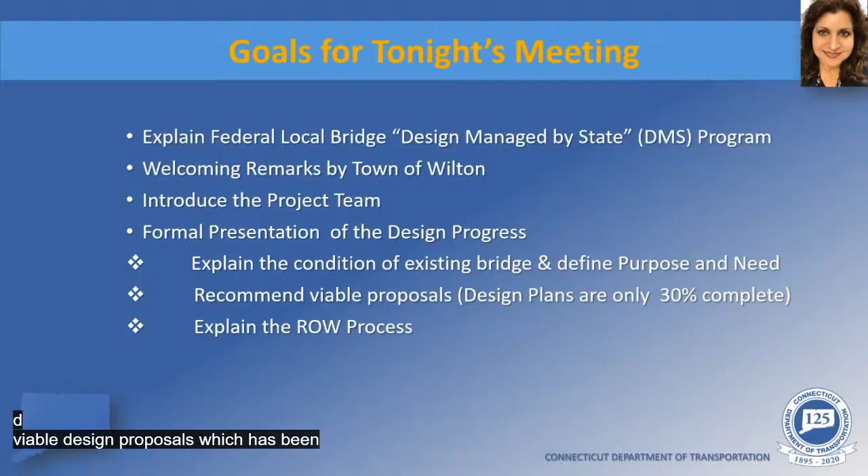The consultant liaison engineers will then give a technical presentation of the design, which will include background of the project, condition of the existing structure, purpose and need for the project, and recommend viable design proposals, which has been completed to around 30%.

As part of the department's public outreach program, it is at this point we reach out to you, while it is still early in the design process, to receive any comments and concerns and also to answer any questions. We will also have a representative from the department's right-of-way office to explain the rights-of-way process. And lastly, we will have a live question and answer session.

I will now explain how this project is being funded. This bridge is a town-owned bridge and is being funded under the department's Federal Local Bridge Program. Traditionally in this program, the town selects a designer, and because federal funds are involved, the department provides administrative oversight, because the department is considered to be stewards of those federal funds.

The funding is traditionally 80% federal and 20% town for the design, rights-of-way, and construction phases of the project. However, this project is going to be funded under the department's newly launched DMS, or Design Managed by the State program. In this program, it will be the department who will be performing the design on behalf of the municipality, utilizing our consultant liaison engineers, who are CHA, or Clough Harbor Associates, on this project.

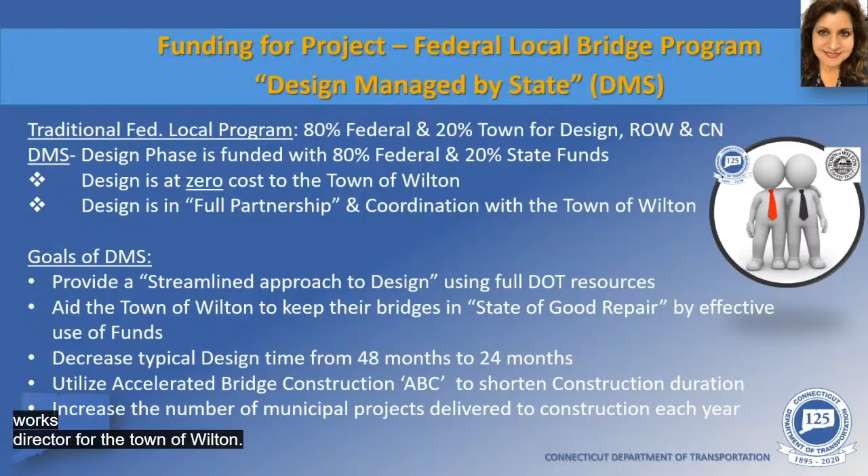Hi, my name is Frank Smirglio. I am the Town Engineer and Assistant Director of Public Works for Wilton. I want to thank everyone for joining. I wanted to give you a little background on Wilton's bridges and a brief description of how it translates into prioritizing the bridge on Lovers Lane.

There are 27 bridges in Wilton that fall into two categories: those over 20 feet in length, and those between 6 and 20 feet in length. The bridges over 20 feet are generally inspected by the state DOT every 2 years. The bridges between 6 and 20 feet are generally inspected approximately once every 10 years by the state. These reports are given to the town as an initial starting point to formulate a master plan. The bridge repairs are prioritized, and Lovers Lane is one of the bridges at the top of the list.

With all the bridges and the various work needed on each, the town has to take advantage of state and federal grant programs to accomplish the work needed on all the bridges. So for Lovers Lane Bridge, this qualified and was approved for what's called the Federal Local Bridge Program. In this program, the federal government pays 80% of design and construction, and the town pays 20% of construction. This grant is monitored by the state of Connecticut DOT.

The state of Connecticut also provides a supplemental program award for this bridge, where they are partnering with the town to complete the design process. This program includes the state paying for the remaining 20% of the design costs. The towns are able to utilize their in-house engineers and on-call consultants to navigate this project through the different design concepts, different permit requirements, and the final design. I look forward to hearing everyone's input, as it's very valuable for the town of Wilton.

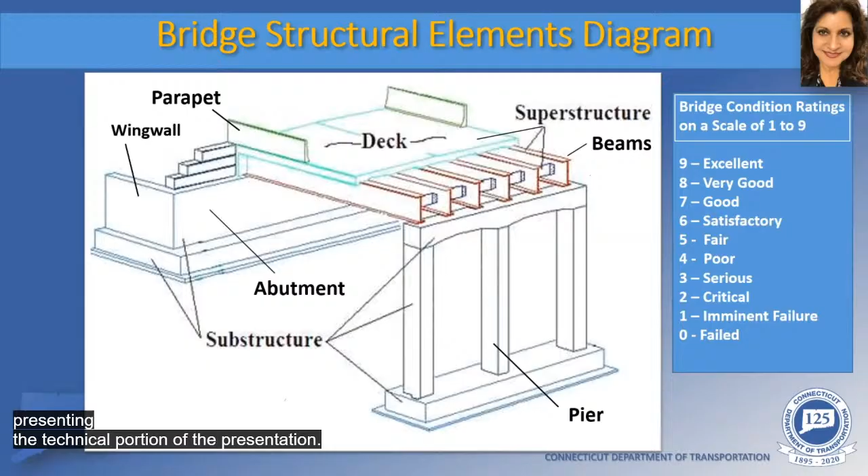Thank you, Preeti, and welcome everyone. As mentioned, I will be discussing the technical portion of tonight's presentation for project number 161-142, replacement of bridge number 4975, Lover's Lane over Comstock Brook.

Following Lover's Lane to its end, you will reach the Merwin Meadows Park. Both Lover's Lane and Merwin Lane are dead-end roadways, and their only means of ingress and egress to Route 33 is across bridge number 4975.

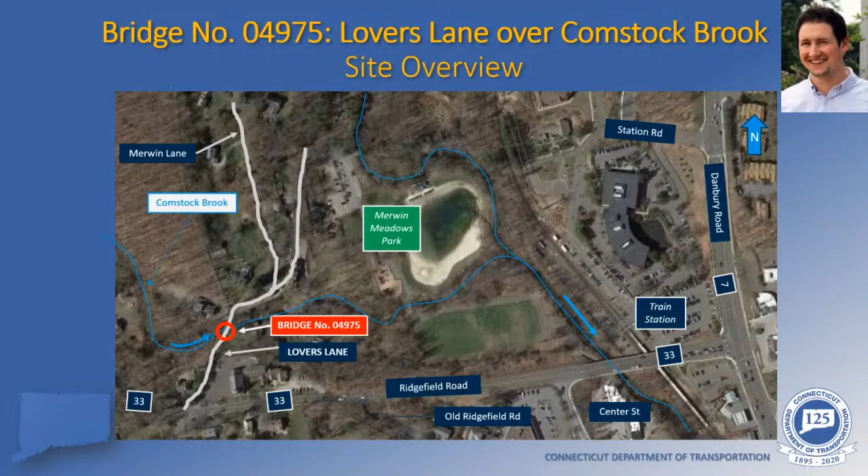Bridge number 4975 was built in 1930 and carries across it approximately 400 vehicles per day. The bridge has a span length of 33 feet and a curb-to-curb width of 16 foot 6. In other words, the drivable width across the structure is 16 foot 6.

In the northwest corner of the bridge, a driveway leads to the play shop. In the northeast corner, there is an existing stone masonry retaining wall that begins at the bridge and extends along Lover's Lane to the north, supporting the roadway. In the southeast corner, the driveway to 10 Lover's Lane immediately abuts the structure. To the east of the bridge are overhead utility wires that follow Lover's Lane to the north, and finally, southwest of the bridge is an existing catch basin that conveys roadway drainage into the brook.

The metal beam rail across the bridge is for containing errant traffic and is mounted on concrete curbing. Above the concrete deck is the pavement structure, comprised of a bituminous concrete wearing surface.

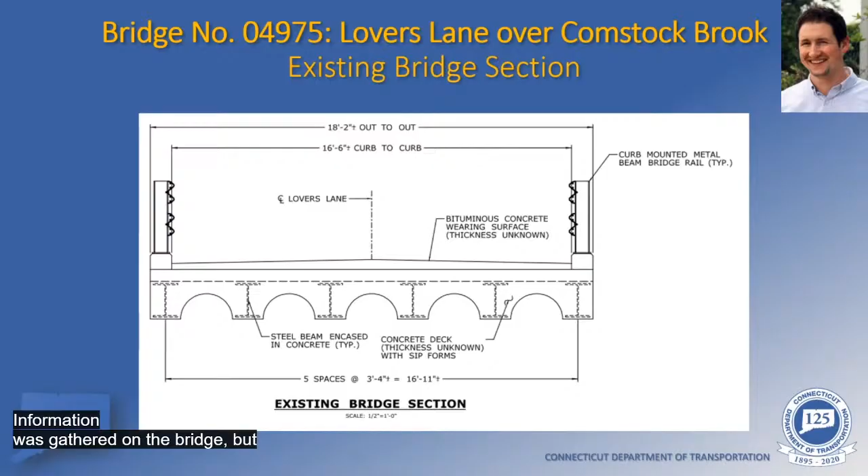As mentioned earlier, the superstructure spans 33 feet across the brook and is supported by its concrete abutment substructures, shown here on the south and here on the north.

The southern abutment is a concrete stub abutment founded directly on exposed ledge. The northern abutment is a taller concrete abutment supported by concrete footings. We can also see the stone masonry retaining wall at the northeast corner of the bridge.

From a hydraulic standpoint, the low chord of the bridge is at elevation 231.5, and the 100-year storm passes adequately below the bridge at elevation 228.95, resulting in a 2.5-foot underclearance below the bridge.

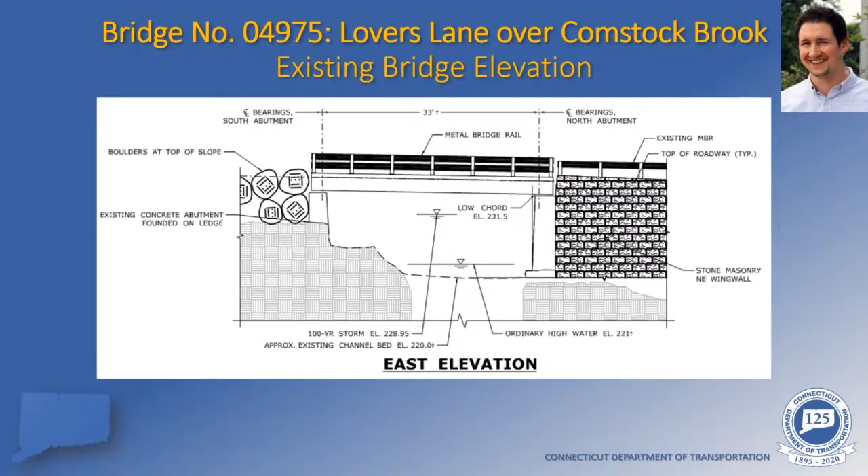Utility wires run along the east side of the roadway with a utility pole present in the northeast corner of the bridge. Heavy vegetation and tall trees are present on both sides of the bridge.

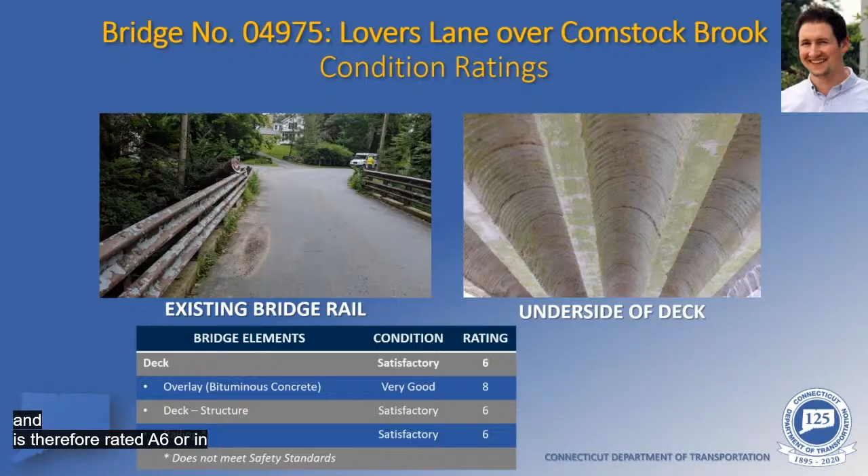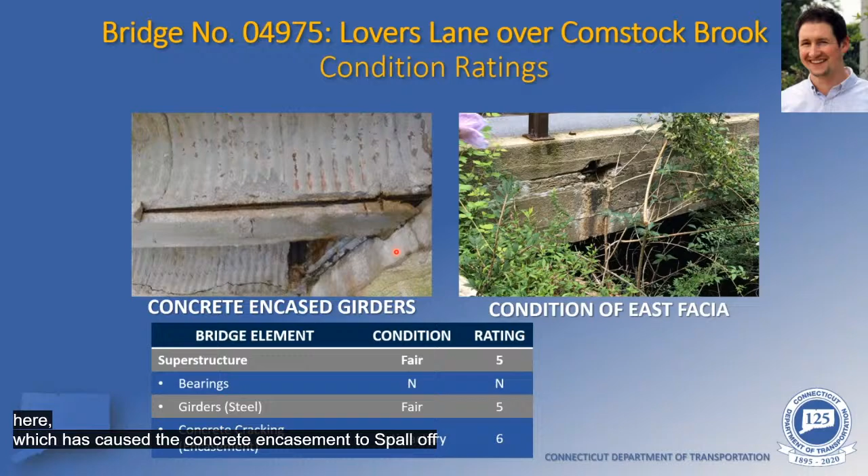However, there's visible deterioration of the steel here, which has caused the concrete encasement to spall off, showing the rusted steel underneath. Moving below the bridge to the substructure, the overall rating, which consists of the abutments, footings, wing walls, and scour, is rated a 4.

As mentioned before, the south stub abutment is founded directly on exposed ledge, as shown in the photo on the left, while the north abutment is much taller and supported by a footing below the water line.

Below the footing, there is a shadow, which indicates a scoured area or a void below the abutment. The deficiencies resulting in the overall substructure rating of a 4 are primarily due to the condition of the north abutment, which exhibits concrete spalling, voids, and efflorescence at the water line of the brook.

The stone masonry retaining wall, also shown in the photo on the bottom right, has missing mortar and voids throughout due to missing stones. More importantly, the scour below the north abutment footing has resulted in this bridge being classified as scour critical.

This is noted by the serious rating of 3 in the table below. If a bridge is classified as scour critical, it essentially means it has high susceptibility for the substructure to be undermined by the erosion of fill material below it due to the flowing watercourse.

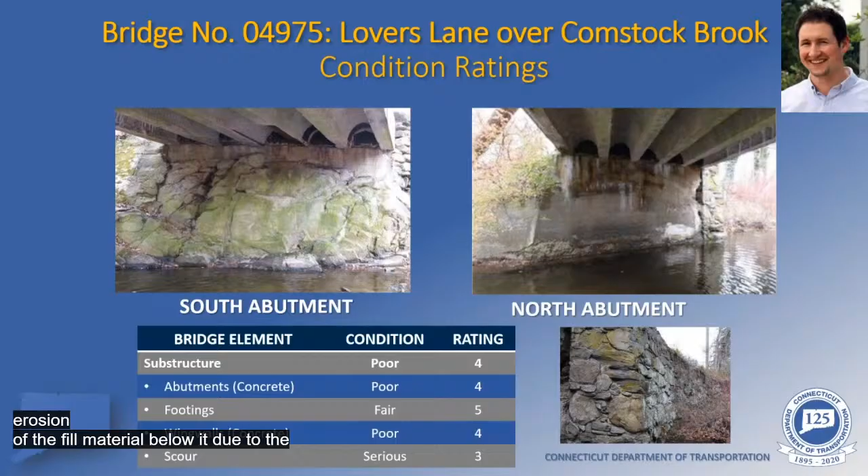Moving on to the condition of the upstream and downstream channel, the overall condition is rated a 6, in satisfactory condition with no noteworthy deficiencies.

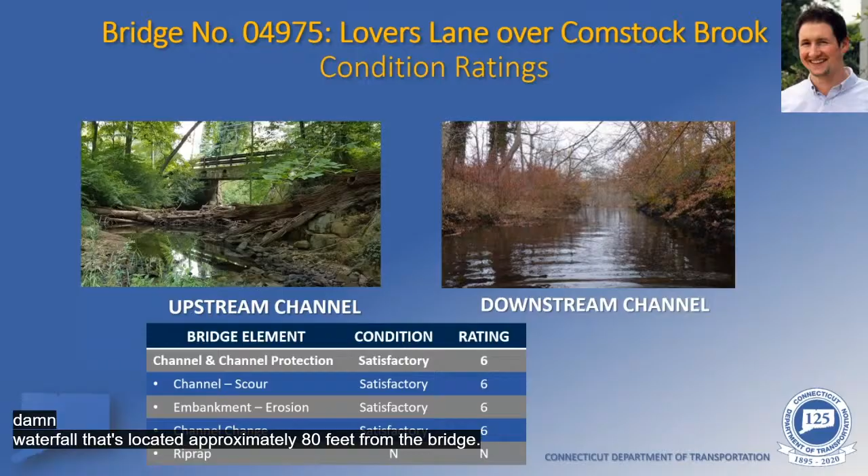On the upstream side, the existing debris across the stream is anticipated to remain in place per request of CT DEEP, in order to provide coverage for existing fish and aquatic populations in the brook. Looking downstream, the sudden termination of the brook is due to a dam, a waterfall located approximately 80 feet from the bridge.

So given what has been shown of the existing bridge, there are several deficiencies to address here. First off, the bridge was built in 1930, so it is over 90 years old and well beyond its intended service life.

Federal Highway, known as FHWA, requires a 22-foot wide curb-to-curb bridge for an ADT of 400 vehicles per day. For the same ADT, CTDOT requires a 24-foot wide bridge because Lover's Lane is classified as an urban local road. Although the state's requirement for curb-to-curb width is 24 feet, the town has the option to choose a 22-foot wide curb-to-curb width for the bridge replacement, satisfying FHWA requirements.

Because the existing curb-to-curb width of 16 feet 6 inches doesn't meet the minimum requirement of 22 feet, the bridge is technically classified as functionally obsolete. The presentation will be detailing a 24-foot wide curb-to-curb bridge, but again, the town has the option to pursue a 22-foot wide bridge in design.

Although in satisfactory condition, the existing bridge rail system does not meet current safety standards.

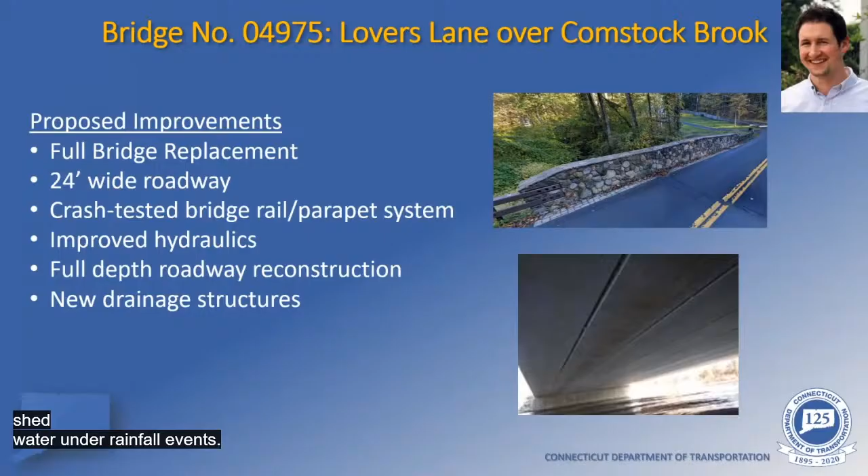During the preliminary engineering phase, various bridge types were investigated for the replacement. However, given the site constraints, the most appropriate bridge type consisted of a pre-stressed concrete deck unit superstructure supported by cast-in-place concrete abutments founded directly on bedrock.

Alternates 1A and 1B consist of the same bridge, the only difference being their means of constructing and handling resident traffic. Alternate 1A consists of installing a temporary bridge across the brook east of the existing bridge, and alternate 1B consists of staging construction across the existing bridge.

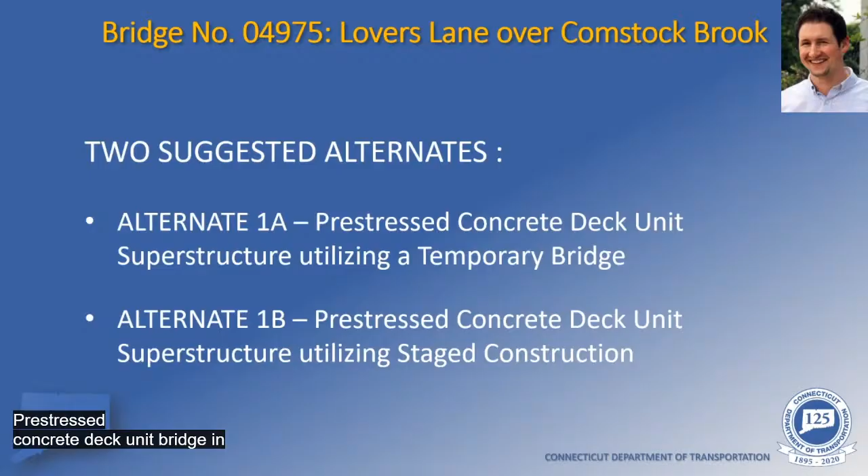The travel way over the bridge is protected by an open metal bridge rail system mounted directly onto concrete curbing. As mentioned before, the superstructure is comprised of 7 precast concrete deck units linked together with a 6-inch concrete deck that is paved over with a bituminous concrete wearing surface.

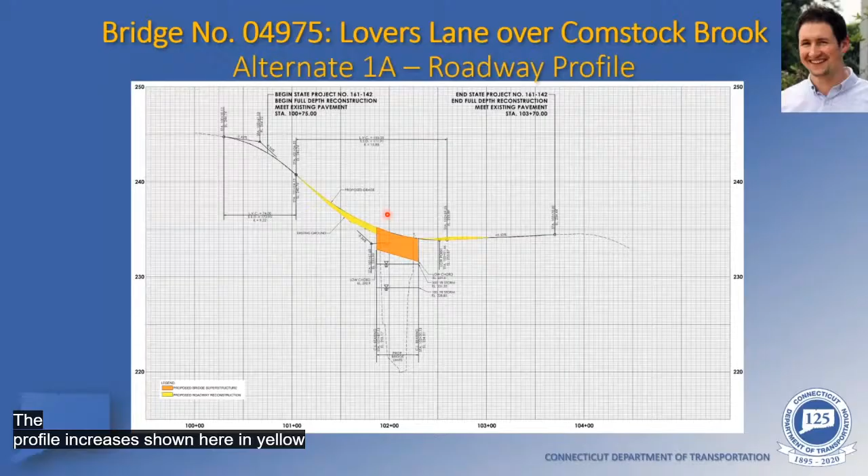As mentioned in the previous slide, the new bridge will require a slight increase of 6 inches to the existing roadway profile at the south approach, and that's to fit the new bridge in place and transition smoothly back into the existing roadway. The profile increase is shown here in yellow with the thickness of the superstructure abutting it shown in orange.

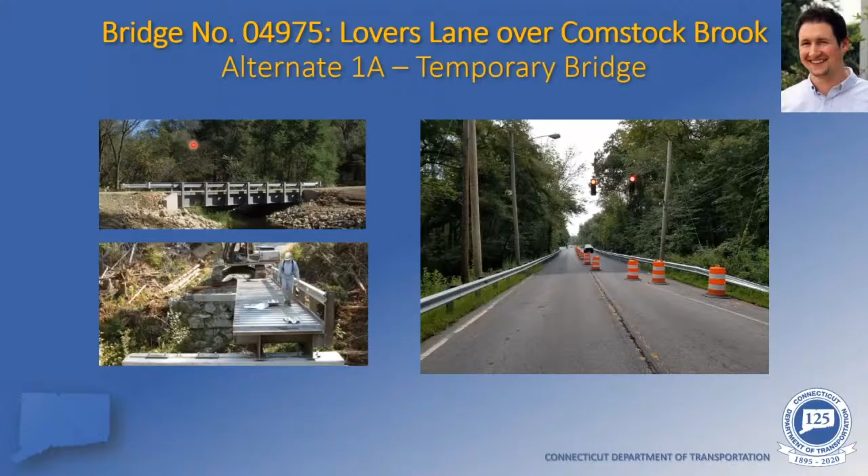The temporary bridge will have a span length of approximately 60 feet and will require a temporary earth retaining system at the corner of Lover's Lane at the retaining wall in conjunction with the work necessary to replace it, as the temporary bridge will be in conflict with it.

Purple barrier is shown west of the temporary bridge along the south and north approaches of the existing bridge.

This will prevent traffic on Lover's Lane from entering the work zone, which the contractor will be working inside of, safely behind the barrier, while the traveling public will be utilizing the temporary bridge away from the work zone.

Temporary signalization lights will be placed at both ends of the temporary approaches for the bridge. This will be necessary for allowing traffic to pass over the bridge in a one-way alternating pattern for the entirety of the temporary bridge while it is in service.

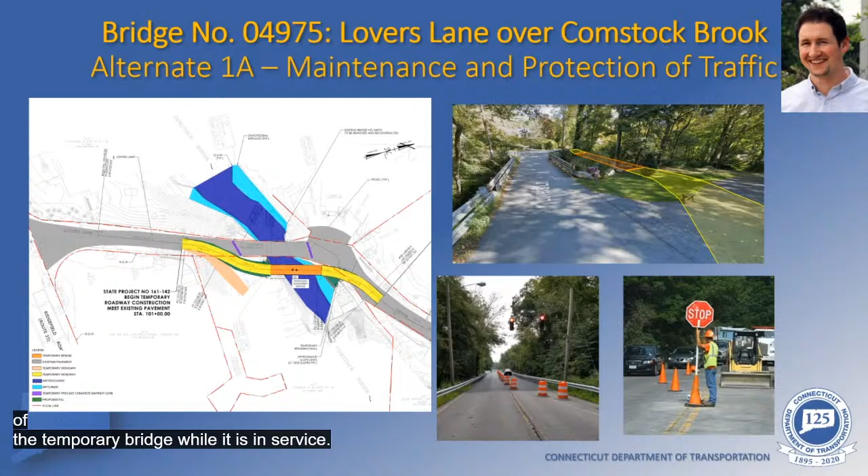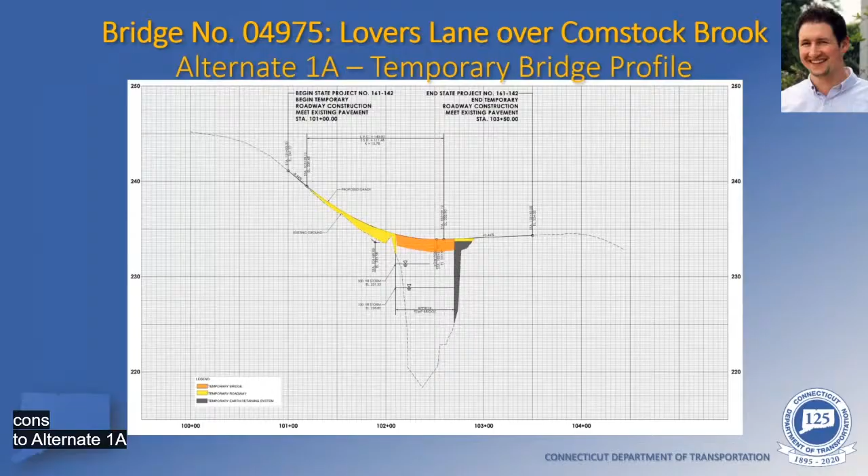Now, before we talk about some of the pros and cons to alternate 1A, I'll first go over alternate 1B. As I mentioned before, the main difference between alternate 1A and 1B is their means of construction. Therefore, the proposed bridge section is identical between the two.

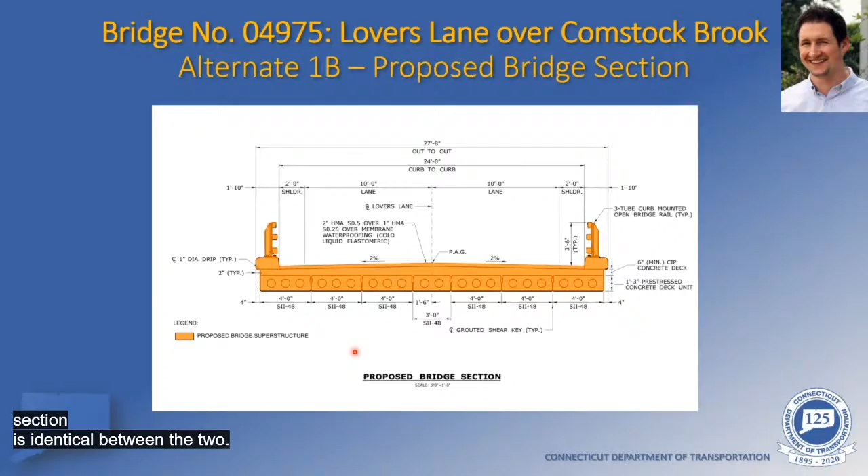Additionally, the shift to the west allows for the existing stone masonry retaining wall at the northeast corner of the bridge to remain in place with repairs, and does not require reconstruction.

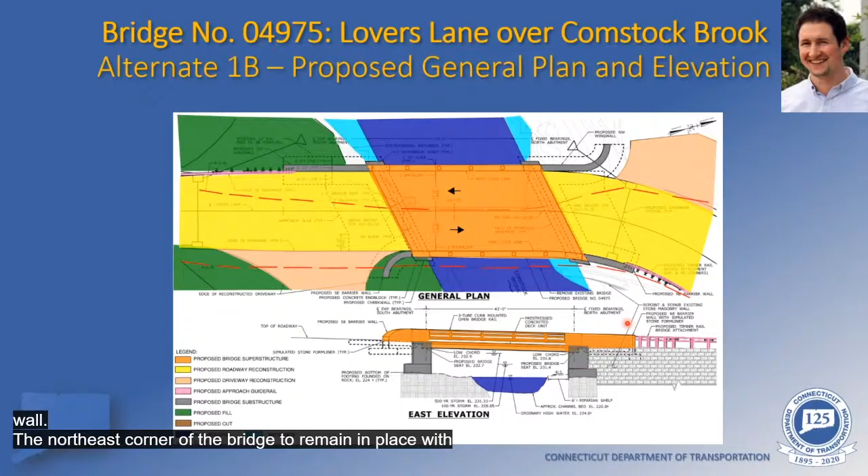As well as the need to only do some minor repairs to that retaining wall and not replace it in kind. The limits of the adjacent driveway work will also be similar to alternate 1A as well.

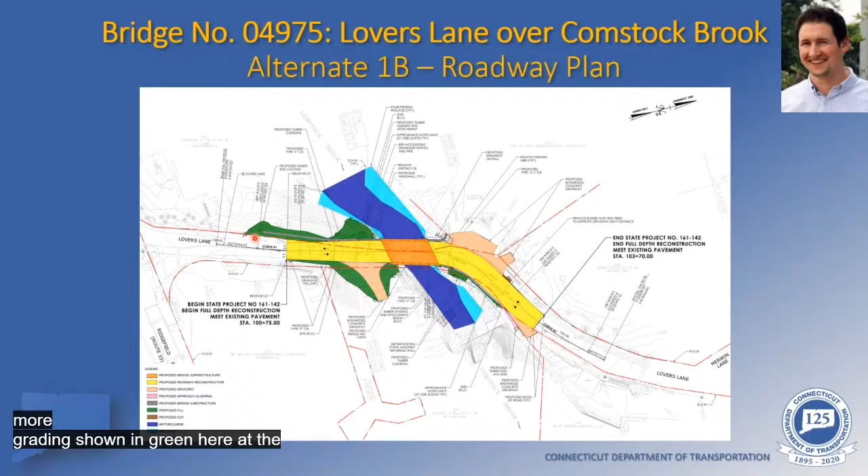Due to that alignment shift to the west, the proposed roadway profile is slightly increased compared to alternate 1A, which results in slightly more grading, shown in green here, at the south approach to the bridge.

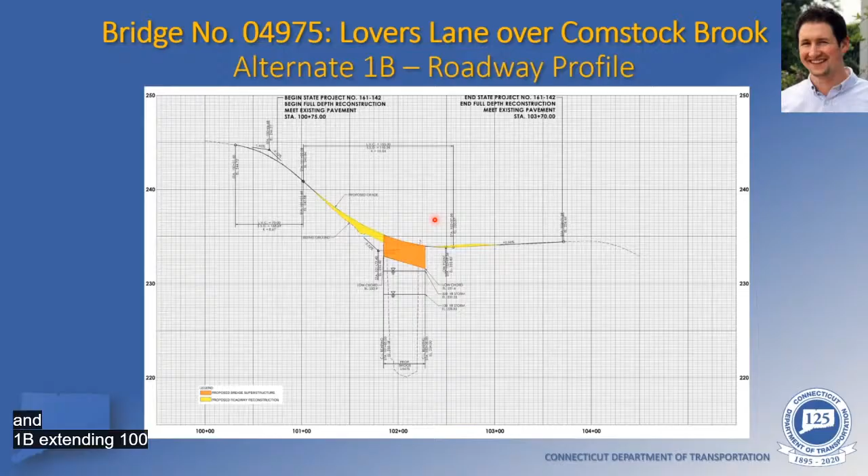Here's a profile of alternate 1B, which is approximately 9 inches higher than the existing roadway. The overall roadway limits are approximately the same between alternates 1A and 1B, extending 150 feet in the north direction and 100 feet in the south direction.

The western portion of the new bridge will then be constructed. In stage 2, a temporary barrier will then be installed on the newly constructed western portion of the bridge, and traffic will be shifted accordingly.

The remaining eastern portion of the bridge will be demolished. The eastern portion of the new bridge will then be constructed and joined with the section built under stage 1, resulting in the final stage cross-section.

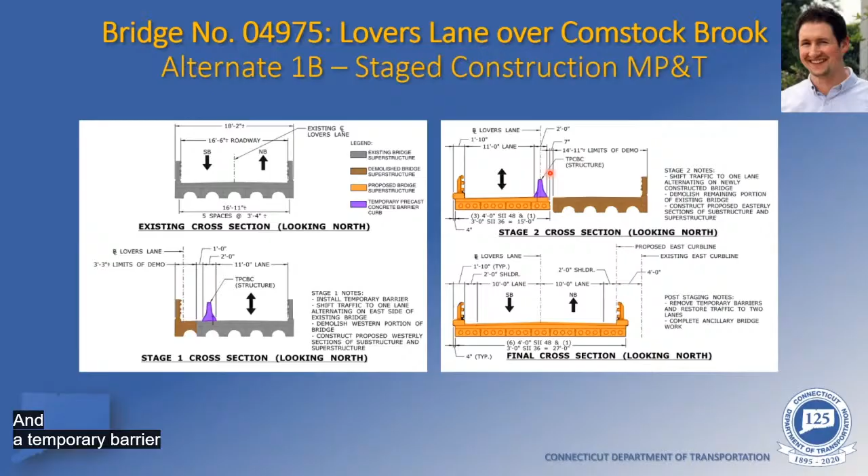As you can see in stage 2, the stage construction results in the eastern curb line of the bridge shifting 4 feet further west. The reason for this shift is that it is required due to the narrow width of the existing bridge and the minimum width that needs to be maintained for a single lane of traffic and a temporary barrier curb during the staging.

However, space is limited behind the barrier, shown in purple here, at both the north and south sides of the bridge. Similar to alternate 1A, temporary signalization lights will be placed at both ends of the existing bridge approaches in order to allow traffic to pass over the existing bridge in one lane in an alternating one-way pattern.

Also similar to alternate 1A, there will be temporary stoppages of traffic as required due to the narrow roadway width of Lovers Lane and the need to move equipment and materials into the work zone and behind the barrier throughout construction. These temporary stoppages will be much more frequent than those in alternate 1A and will occur throughout the duration of construction.

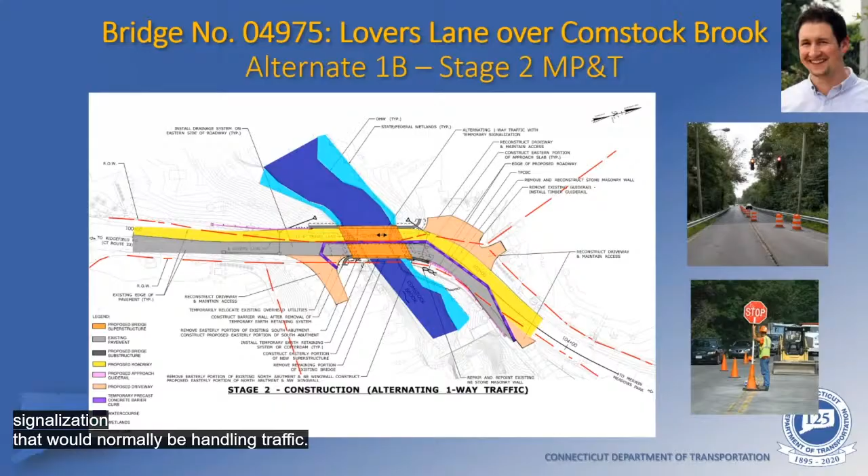So far we've discussed mostly the technical aspects of the new bridge. Let's take a moment to discuss some of its aesthetics.

As mentioned before, there are overhead utility wires on the east side of the bridge, shown in the photo to the right. The temporary bridge in alternate 1A will require the wires and the utility pole at the northeast corner of the bridge to be relocated further west of the bridge and out of the way.

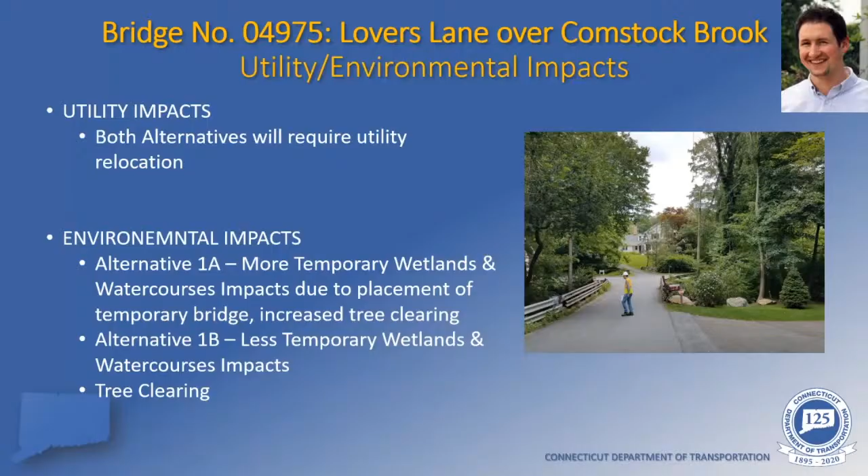So in order to construct the new bridge, property acquisitions and easements, both permanent and temporary, will be necessary.

Permanent acquisitions are portions of property that will be acquired by the town in order to ensure the limits of the new bridge and roadway are within the town's right-of-way, in order to facilitate future maintenance.

Permanent easements will be obtained by the town, and these are necessary to maintain certain elements of the bridge, such as a steep roadway slope at its approach, or the need to maintain approach guide rail. The difference between this easement and acquisition is that the property remains with the owner.

And lastly, temporary construction easements will be obtained by the town in order to provide access to the bridge for the contractor and equipment during construction. The temporary easement is expunged upon the completion of the project.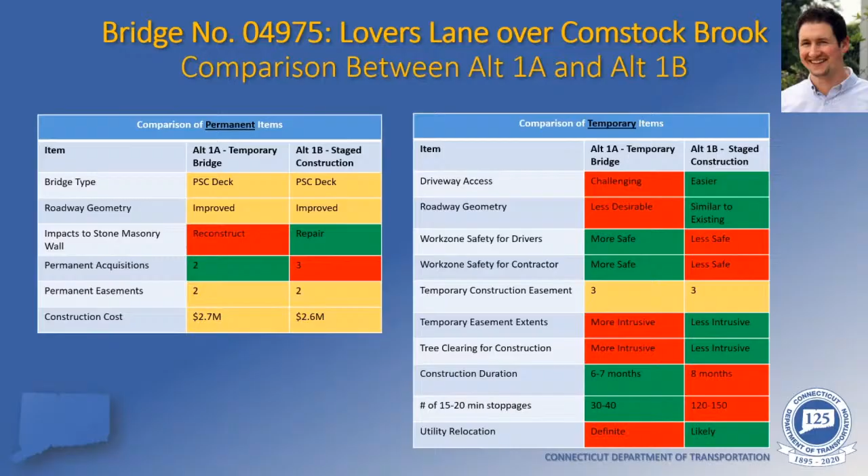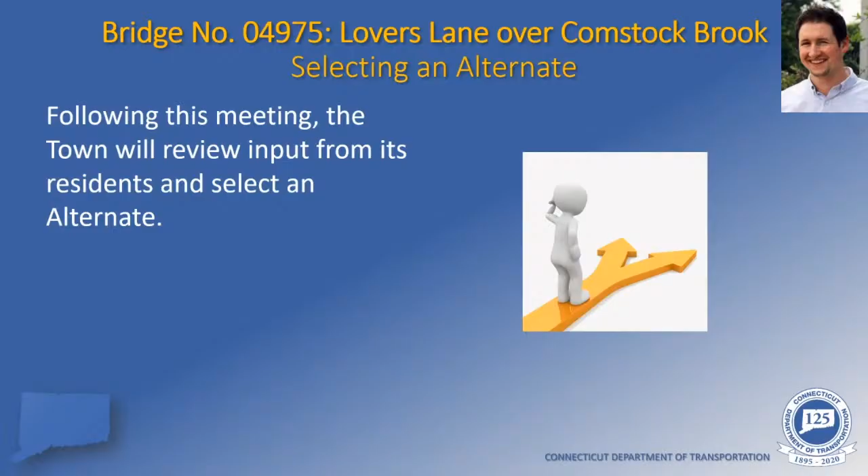However, we encourage you to actually provide your questions and comments to us during and after the presentation. So after all the comments have been received from the public during and following this presentation, the town will gather them for consideration and ultimately conclude in selecting the alternate for the bridge replacement.

So before I wrap up my portion of this presentation, I wanted to provide a brief overview of the anticipated costs and schedules. Currently, the project is expected to begin construction in the spring of 2023 and finish in the fall of 2023, under one construction season.

The anticipated construction costs of the two alternates are outlined here, with 80% federally funded and 20% being covered by the town. Please note that costs and schedule are preliminary and subject to change.

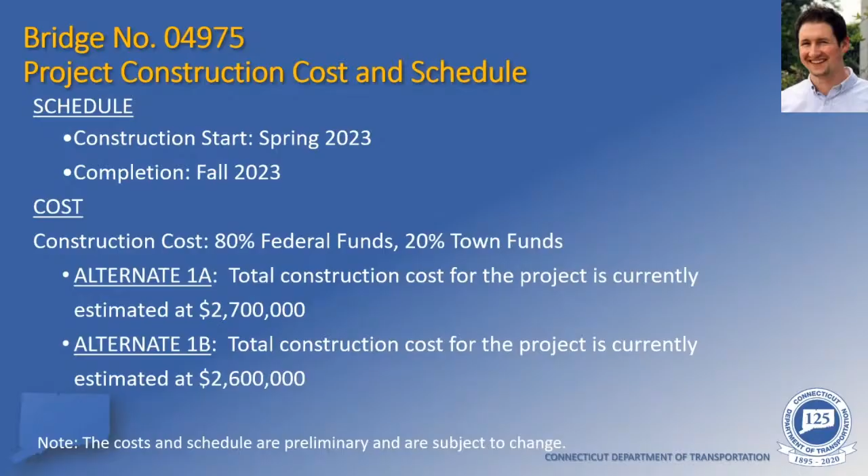My name is Dennis McDonald, and I'm a representative from the Connecticut Department of Transportation Division of Rights-of-Way. I'm here tonight to provide a brief overview of the right-of-way process. Please note, the Town of Wilton has asked DOT to take the lead in terms of right-of-way activities for this project, but DOT will work in concert with the Town of Wilton and Frank Sermiglio to successfully accomplish project goals. That being said, let's talk about the right-of-way process.

So the function of the Division of Rights-of-Way is to acquire all property and property rights necessary for the project. This is done in accordance with Connecticut General Statute Section 13A73, 13A98E, as well as the Uniform Relocation Assistance and Real Property Acquisition Policies Act of 1970 as amended.

Now, as you just saw, there are a couple options for the design here, but typical property impacts include partial acquisitions, easements, and various other rights. Of course, this is subject to change as the design progresses.

Once property impacts have been determined, each impacted property owner will receive a letter of intent to acquire, along with a property acquisition map. The letter essentially initiates the right-of-way process, and the map provides a detailed breakdown of the specific property impacts. Soon after the letter and map are received, a valuation process will take place, and once a value has been established, each impacted property owner will receive a written offer of compensation.

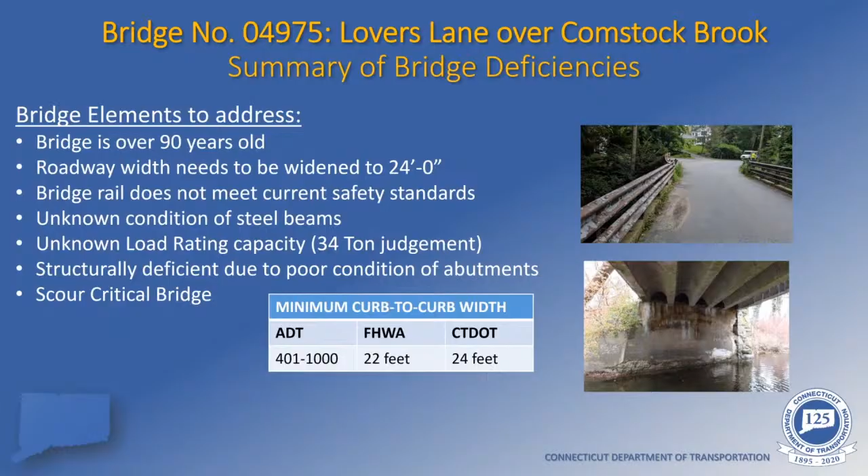Federal highway guidelines require that if the vehicular count on a daily basis is 400 or less, the minimum roadway width on the bridge needs to be 20 feet. However, if it's 401 up to 1,000 vehicles a day, the minimum width per federal highway guidelines is 22 feet. As shown in our presentation, our design accommodates a 24-foot wide roadway, which covers the traffic. Should the town later decide to go with a 22-foot roadway, that would also be fine, satisfying FHWA guidelines.

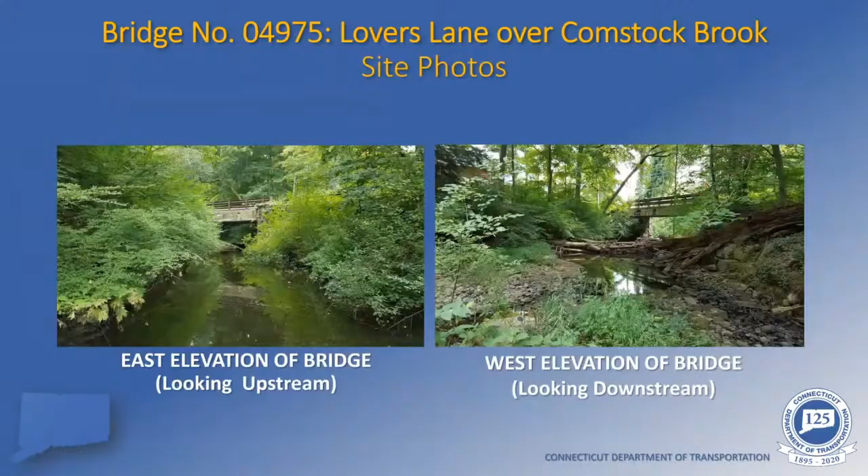We have another question: when is construction anticipated to start? This is Tom from CHA. Construction is expected to start in the spring of 2023 and complete in the fall of 2023.

The following email question was received: will the new bridge receive aesthetic treatments to make it fit in with the surrounding environment? Short answer is yes. I'll have Tom from CHA start, and perhaps Frank from the town can also weigh in.

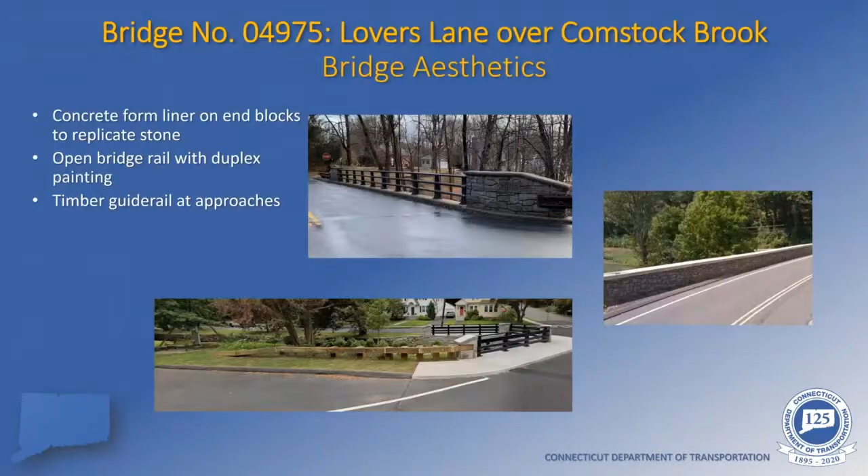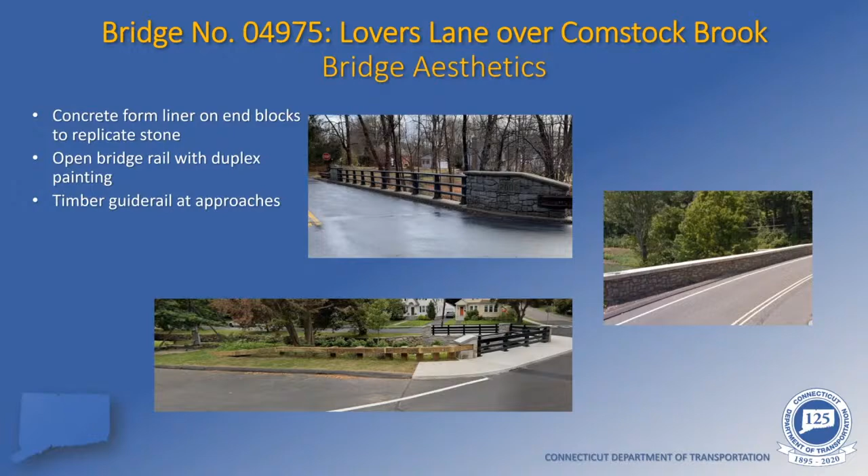Yes, there will be aesthetic treatments done on this bridge. The current slide shows the normal design for this type of bridge: usually an open metal bridge rail system with concrete end blocks that have a nice form liner stone pattern, with timber guide rail connecting as the bridge approaches. That's one typical design for a bridge in an area like this with high character. Another option would be a parapet that is fully stone, as shown in the photo to the right, instead of the metal bridge rail. Those are the two typical options. A third option, at additional cost to the town, would be to use real stone masonry parapets, as shown in the photo on the left.

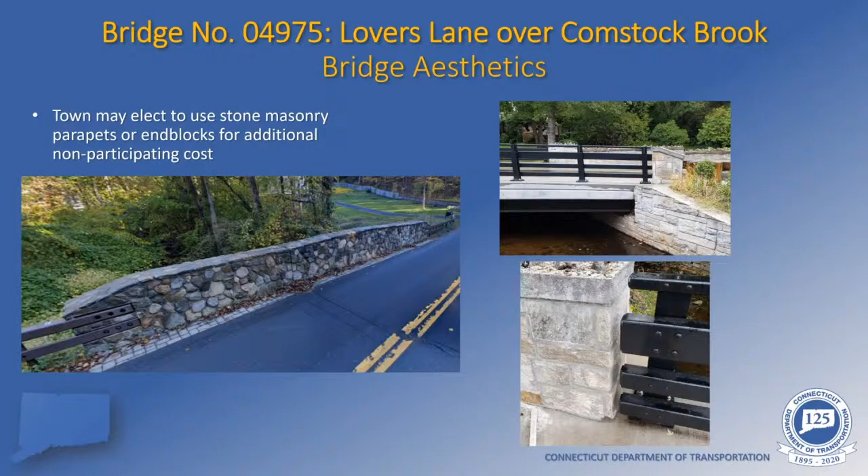Adding to what Tom mentioned, some of these aesthetic treatments, like the color of the bridge rail and the type of stone masonry, will all be selected by the town, so they will have input on that.

This is Frank Smirglio from the Town of Wilton. One of the things we're looking to get from this meeting is input from residents as to the type of end walls and parapet walls. Our intention is to take that information, have discussions with the Architectural Review Board and the Historic Commission, and then combine input from residents and the commissions to proceed to final design.

Thank you very much, Frank. We have another question: how long is construction anticipated to take with stage construction versus the temporary bridge?

This is Tom again. Let me pull up the slide that compares the two. For the temporary bridge alternate, it's anticipated to take approximately 6 to 7 months. With the stage construction alternate, it's anticipated to take approximately 8 months, which is a typical construction season for a project from April 1st to November 30th. So with stage construction, we're looking at a full season.

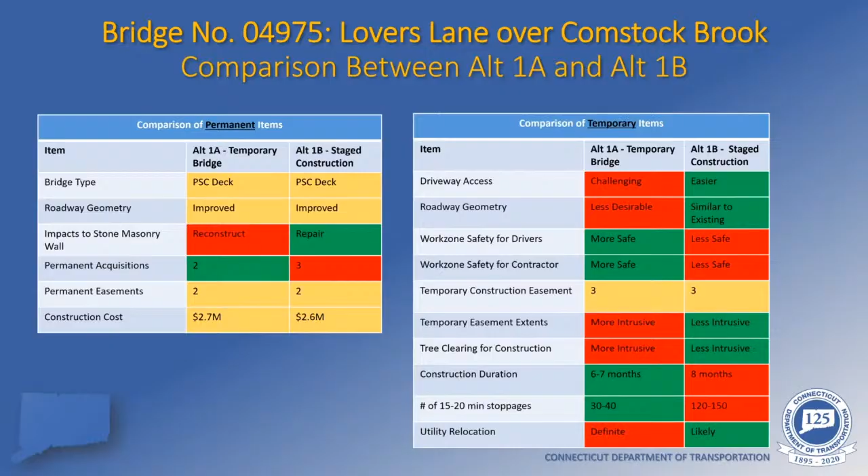Thank you, Tom. We have another question: can you explain what variables underpin FHWA curb-to-curb limits, and provide a link to ADT and FHWA guidelines relevant to curb-to-curb minimums?

CHA, can you please take that question? Sure. Are we able to share the table that has that information so that I can explain that?

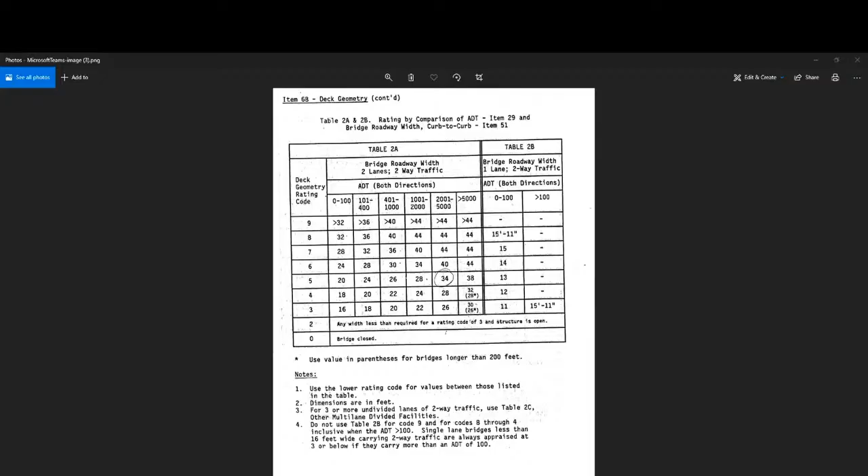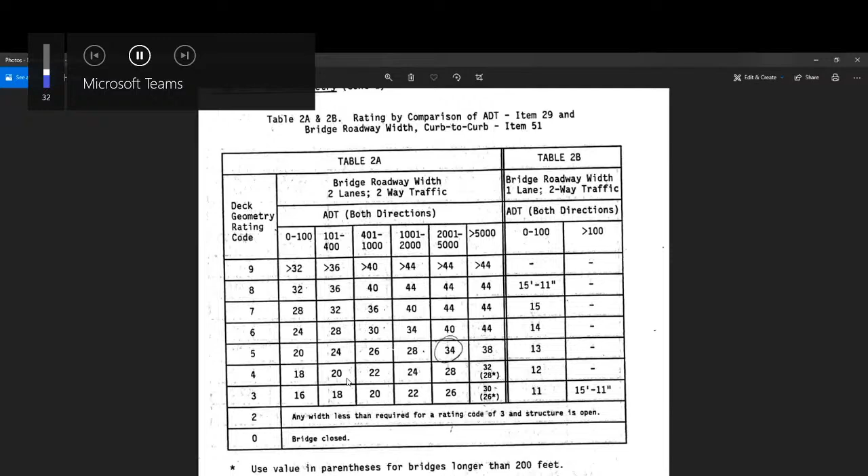So what you're seeing on screen is basically the FHWA guidelines for item 68, deck geometry. The leftmost column shows the deck geometry rating, and the minimum number FHWA wants us to target is a rating of 4. For average daily traffic of 101 to 400 vehicles, the minimum roadway width required is 20. For average daily traffic between 401 and 1,000 vehicles, the requirement is 22. That's the basis of the FHWA guidelines and the connection between the rating and the average daily traffic.

Okay, thanks Anand. I think we can also send this person a link to this table as they requested, correct? Yes, we can do that. We can, I don't know if we can do it right in the chat box when we reply, or we can reach out to them later if they send us an email. We can send it through email as well, or forward it to Frank. Okay, as long as it's addressed somehow.

Thank you. Another question: has the town secured the necessary funding for the bridge replacement? Frank, can you please take this question?

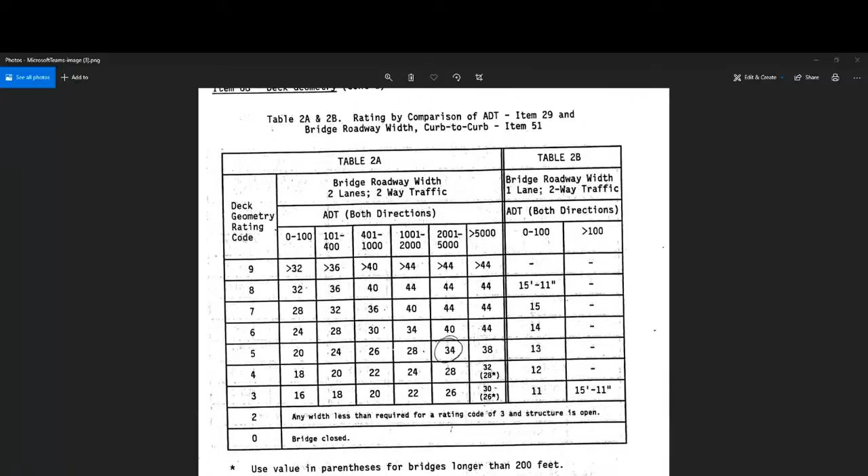Sure, this is Frank from Wilton again. So we did secure our 20% match for the project. And obviously, as we move design forward, we will keep evaluating the estimate for the project so that we can make sure we're all within budget for what we secured and also for what the grant award is.

Okay, thank you, Frank. Another question. The following phone question was received: What is a temporary construction easement and permanent easement, and why is it needed for this project?

So can we start maybe with Dennis from Rights of Way? He can explain and follow it up with CHA, showing where the temporary easements and permanent easements are needed.

Thanks, Preeti. This is Dennis from DOT Rights of Way. A permanent easement is essentially a right to use land, or in this case, private property, for a specific purpose. The property owner still owns the land, and the state will purchase the specific property rights. The easement is recorded on the land records and will run with the land. A typical permanent easement is a slope easement, which would allow us to establish and maintain a slope for the support or safety of the road or bridge.

A construction easement, on the other hand, is also a right to use the land, but specific to construction activities. The easement is recorded on the land records, but is temporary in nature and is extinguished upon completion of the project. Okay, thanks Dennis. Thank you, Dennis.

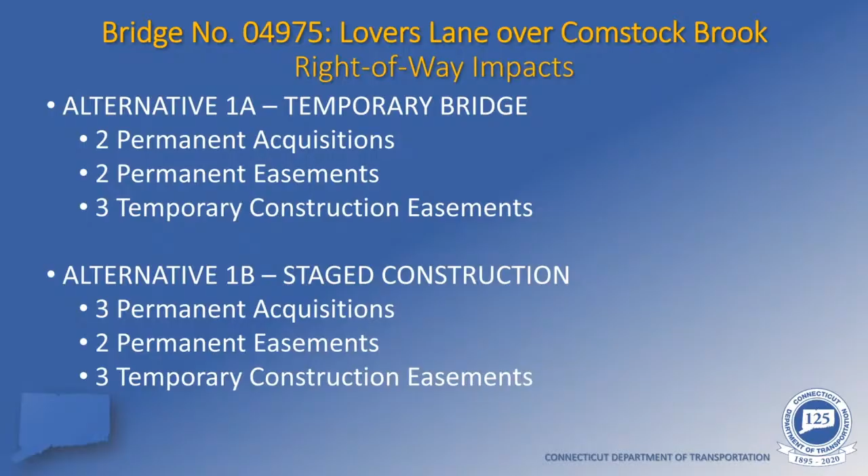So quickly going to the plan view showing where these easements are. The areas in red are the permanent acquisitions, and those are required because we are widening the roadway, and the bridge and roadway need to be on town property. So the permanent acquisition will account for that.

The areas in green will be an easement. The guide rail easement, where the pointer is currently located, will allow the town to go out and maintain and fix the guide rail, even though it is on private property. So it's not an acquisition per se, where an area of land is taken by the town. It's still the property owner's land, but the town can go in there and make repairs to that guide rail should it become damaged.

Additionally, Dennis mentioned a slope easement. So if you look at this little green triangle here, that represents a fairly steep slope along the roadway and near the bridge itself. What a slope easement basically does is prevent the property owner from removing that slope because it is supporting the roadway. If that slope were removed, it could jeopardize the structural integrity of the road itself. So the slope easement states that the owner can't excavate any of that soil that would potentially jeopardize the roadway.

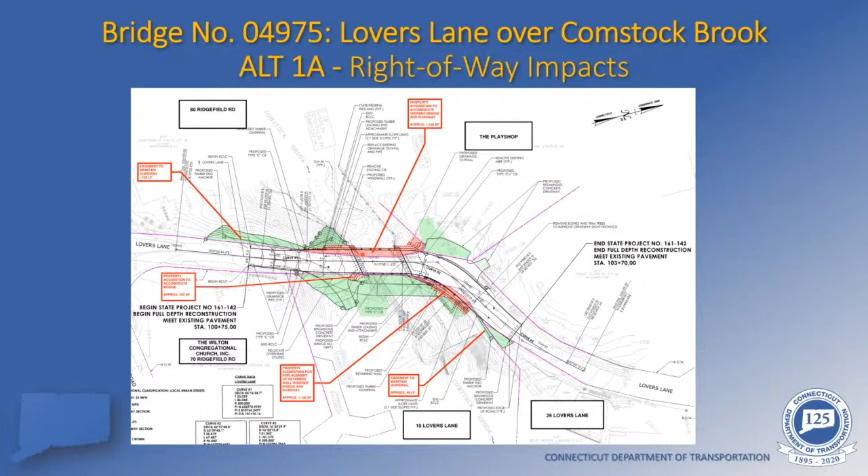And then real brief, talking about the differences between the two: Alternate 1A has the permanent acquisition on the west and on the northeast corner, whereas Alternate 1B has more of a permanent acquisition on the west because the roadway is shifting further west, and that permanent acquisition on the northeast corner is lessened because the retaining wall work is not needed under this alternate. I hope that clarifies the differences and how they are impacted by this project.

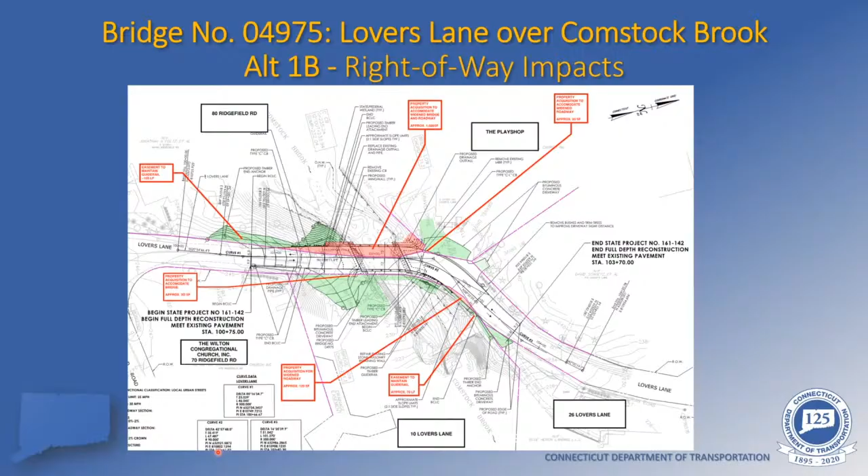We have another question: is there an option to have a sidewalk/bike lane across the bridge? I can start with the answer on that question and probably have the town weigh in as well.

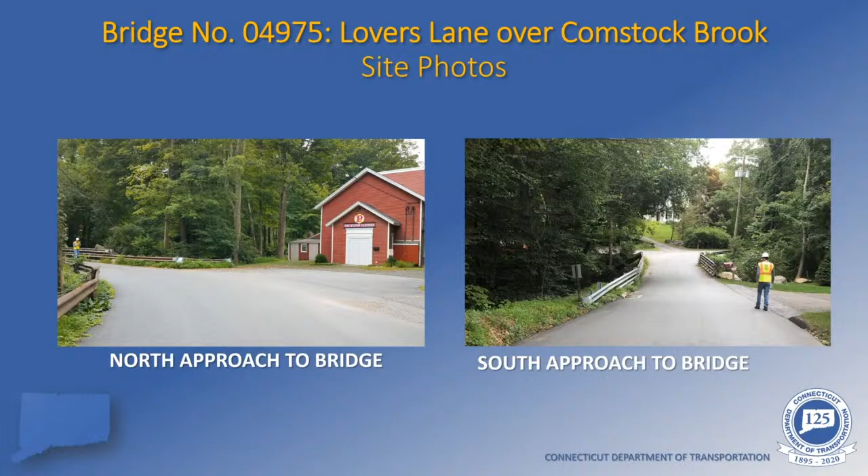Currently there is no plan to put a sidewalk or a bike lane across the bridge, and the reason for that is that currently the bridge does not have either. If it did, obviously we would have done that here. Secondly, we could put a sidewalk if the town has future plans in the works to have connectivity on the approach roadways. If we knew that was in the works by the town, we could also probably put in sidewalks. But at the same time, if we do put in sidewalks, you will have a wider bridge. So just pointing that out.

So Frank, can you let us know what the town's plans are, if there are any, in terms of future sidewalks? Yeah, as of right now, there are no plans for future sidewalks. There's the retaining wall as you cross over the bridge going towards Merwin Meadows - there's the big wall on the right there, so trying to put sidewalks going down to Merwin Meadows is very difficult. So I'm not aware of any future plans for sidewalks. And again, I know that the width of the bridge will be a sensitive issue, and adding sidewalks now will only make the bridge another five feet wider. So that may be an issue in itself if we make it wider now for plans down the road that, as of right now, don't exist.

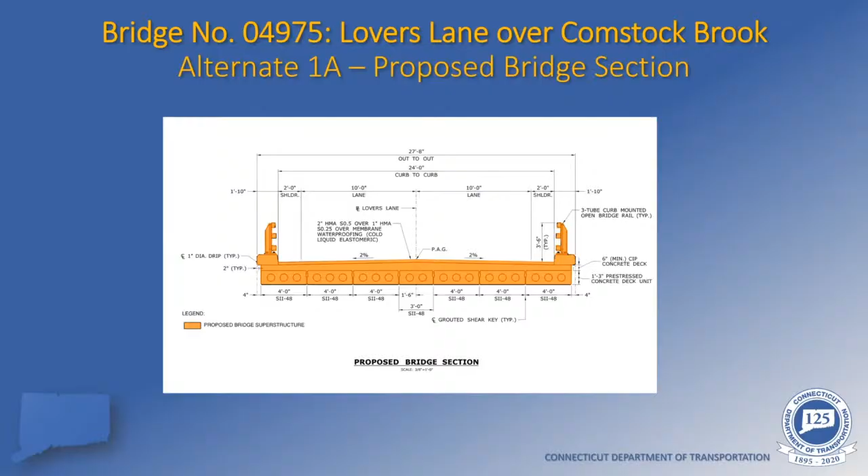Next question: what are going to be the work hours during construction, and is night work anticipated? CHA, can you please take that question?

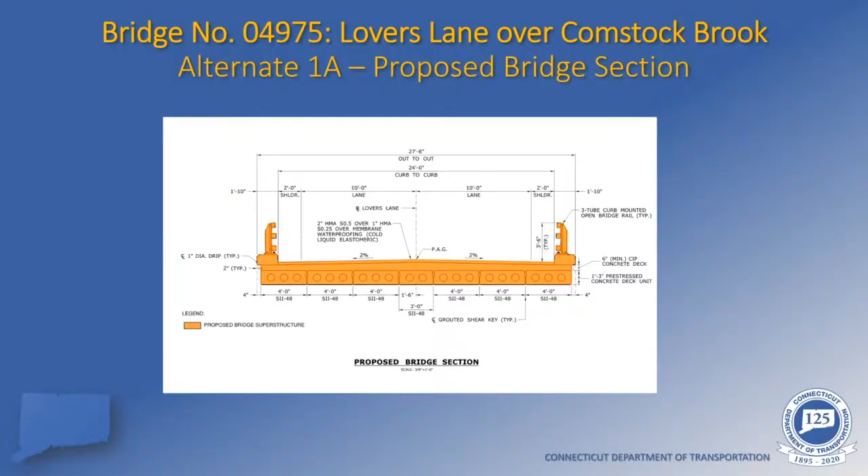Sure, this is Anand. Generally, the project specifications will call for contractor work hours to be on weekdays, Monday through Friday, between 7:30 a.m. and 4:30 p.m., and no work will be allowed during the weekends unless approved by the town. As far as night work is concerned, we don't anticipate the need for any night work on this project, because there would be sufficient calendar days available for the contractor to accomplish the construction with either of the alternates just by working during day hours.

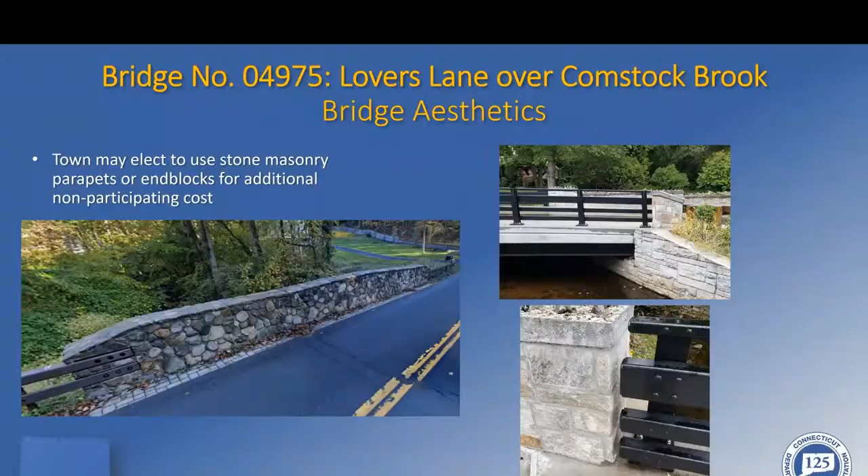The later decisions we'll make are the type of stone, and if it's an open rail type bridge, the color of the rail. So again, there's a priority of decisions to make. We plan on having an active web page on our Department of Public Works website sharing the latest information. My office is here in Wilton, so anyone can call me anytime, or stop in by appointment. That's our intention for receiving input from residents.

Okay, thank you Frank. We have another question. The question is: there are not 400 vehicles that cross the bridge daily. I guess that's a statement. I'll have Anand from CHA respond to that.

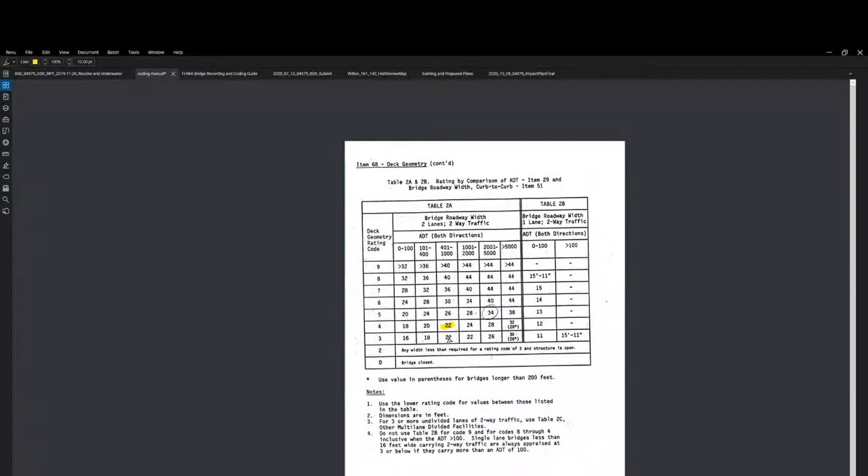As I mentioned previously, we had not done a formal traffic survey because of the COVID situation. What we do have is records from past traffic information contained in bridge inspection reports, with volumes projected for the current year, indicating 400 vehicles as the current ADT. That's how we based our design. With 400 being on the threshold between two different criteria - 20 and 22 - to be conservative, we took the criteria for vehicles between 401 and 1,000. So 22 feet was the requirement based on that.

This is Frank with the town. Just to add to that, the use of Merwin Meadows really adds traffic flow to that road. That 400 vehicles per day - each trip to Merwin Meadows and then leaving counts as 2 vehicles, and you'd be surprised how fast 400 vehicles adds up. Also, this year there was definitely limited use of Merwin Meadows because of COVID, so it was difficult to get a true count based on this summer.

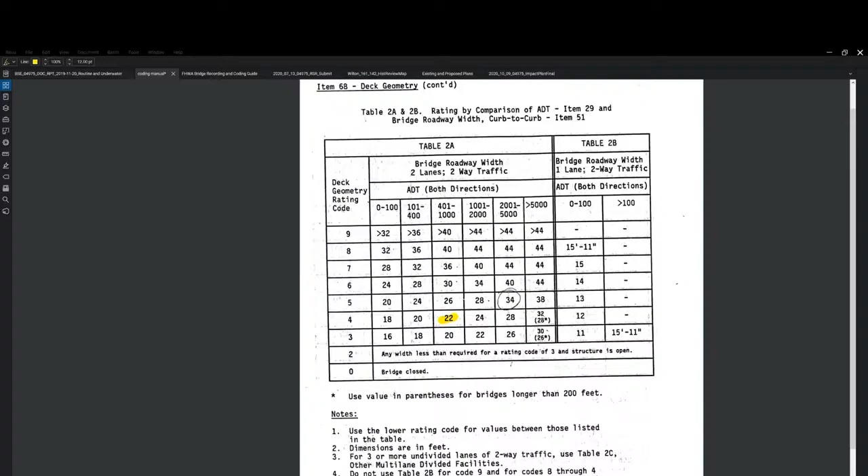Okay, thank you Anand and Frank. We have another question: why did we do all this work on designs for a 24-foot width before soliciting feedback, if the guidelines only stipulated a 22-foot width based on an estimate of 400 vehicles per day? Can we start with Anand, and Frank, if you'd also like to chime in.

Hi, this is Anand. There are actually two important things when we design or determine the roadway width. One is what we've been discussing a lot - the FHWA federal requirements, which are based on the average daily traffic. The second criteria, which we haven't spoken much about, is the Connecticut Department of Transportation's highway design requirements for an urban local road.

Lovers Lane is classified as an urban local road, and for any new construction, the guideline is a 24-foot wide roadway. That said, since it's a state requirement, the town does have leeway in not meeting it and just satisfying the FHWA requirements. So we wanted to make sure that when we design something, we were satisfying both the federal and state requirements. The town has the option of selecting something as long as it definitely meets the federal requirements.

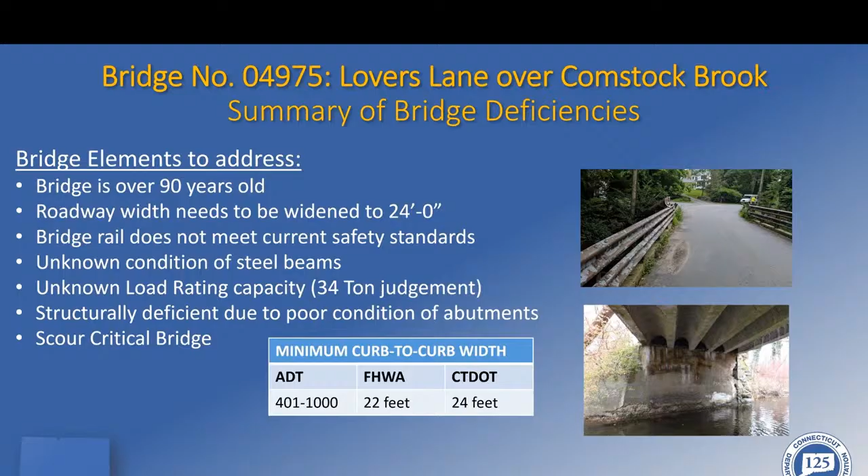Secondly, Tom explained the two stages of construction: one with the temporary bridge, and the second with the staging. Hypothetically, if the town goes with a staging alternate, and we don't go with a 24-foot wide roadway, the current shift in alignment that we show to be 4 feet will actually be more than 4 feet.

The other thing to add, this is Frank from the town. As part of the design process, there's a preliminary design, and with preliminary design you have to look at all the options. There was a lot of work involved, but you have to show plans of the effects if you make the bridge 24 feet, and the effects if you make the bridge 22 feet. That's an exercise that has to happen.

There were a few other options considered too, but these two are the ones being presented to the residents. When you're looking at a bridge, you're only building it once, so you have to look at the effects of making it 24 feet versus 22 feet. It's definitely an exercise that has to happen as part of this process. Moving forward, we won't continue both options—we'll just move forward with one. That's the big picture answer to why the evaluation was done.

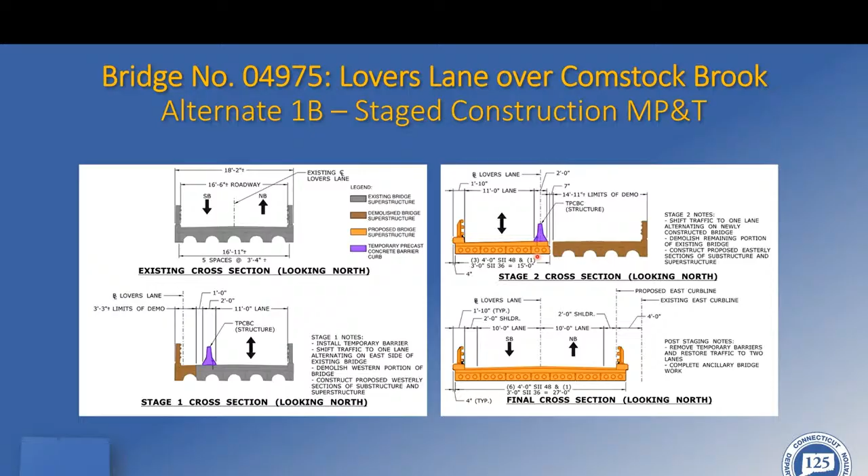Now you may ask, why are we shifting the alignment? Why don't we just hold the curb line where alternate 1A is doing? The reason we don't do that is because of the exercise we just walked through with the various stages. We need to maintain that minimum 11 foot, and if we didn't move the shoulder, we would essentially be left with an overbuilt bridge that is not 24 feet, but rather 28 feet to properly stage it. So the way of getting around making a wider bridge to make staging work is to shift the alignment into the stage construction. As we make the bridge narrower, that alignment shift becomes even greater.

So I hope that helped answer that.

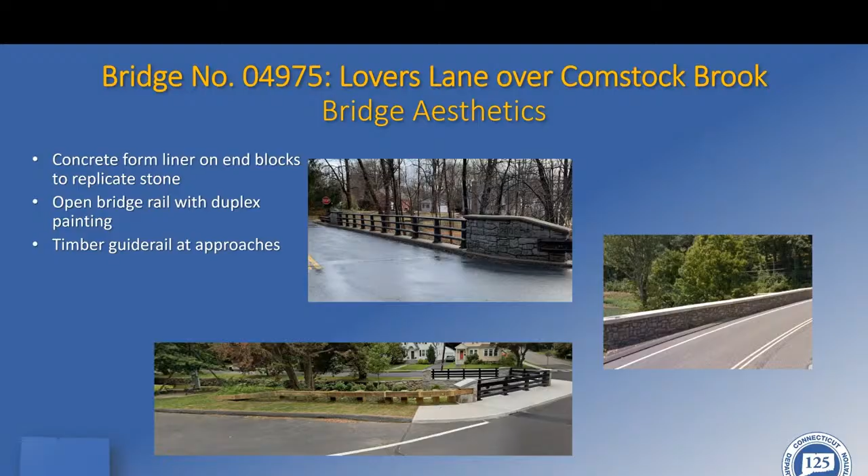And just to add to that, this is Frank from the town. That's in the stage scenario. In the scenario, in the alternate where there's a temporary bridge, basically you're building the temporary bridge first, and then once the temporary bridge is active, you can remove the existing bridge and place it back where you want it. So in that scenario, we would hold the curb line, the eastern curb line, so that the 22 feet starts from that same edge of where the eastern curb line is now. Yeah, that's correct, Frank. So with the stage construction alternative, going with a narrower bridge becomes even more complicated.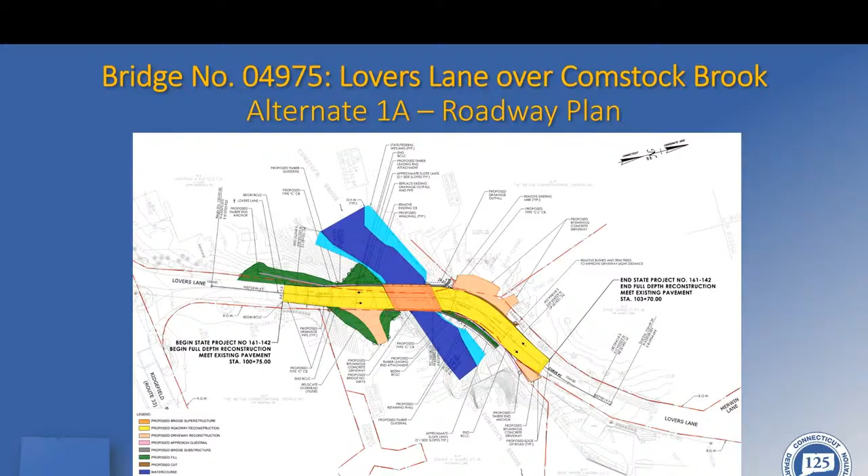Yes, James, if you could, I sent you a picture, if you could post that up. I took a screenshot of the traffic counts between 2011 and 2014 using the portable count stations on the adjacent roads, which are Ridgefield Road and looks like Belden Hill Road. At the intersection right before Lover's Lane, going more towards Route 7, the average daily traffic was approximately 13,000 vehicles per day. Thank you, James. On Belden Hill Road, it was approximately 4,500 vehicles per day from 2011.

And then going from the intersection, it was 7,700 vehicles per day. So using this data, I believe Bridge Safety interpolated this data based on vehicles in the area and whatnot. We are available to do a traffic count.

However, I should caution too that based on these numbers, if the counts come up higher than 400 vehicles per day, say per chance we hit the 1,000 mark on vehicles per day, we would be forced to go to a wider bridge.

And just one other thing to add to that, if the number was 390 vehicles per day, this bridge is going to be here for a long time. So I don't think I would recommend finding a survey that shows that the vehicle count is 390 just to get the bridge down to 20 feet wide. I still would strongly recommend 22 feet wide to satisfy functional obsolescence criteria.

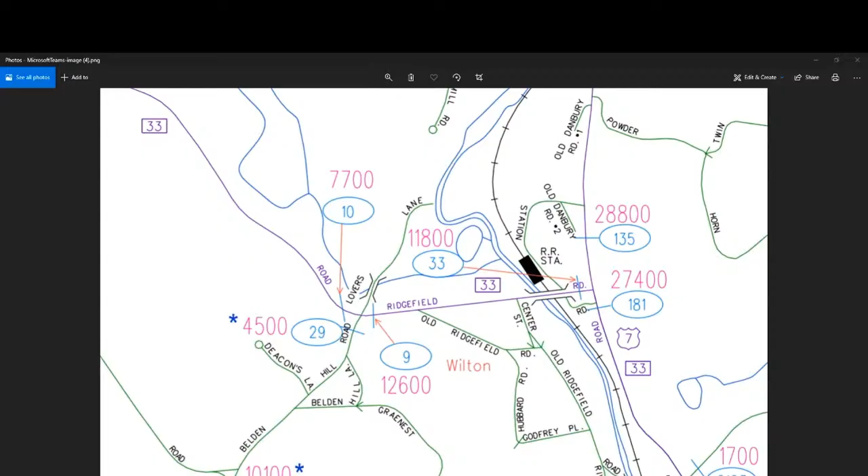Thank you, Frank, and that is a very good point. Ladies and gentlemen, I do want to point out that this bridge replacement, this new bridge with proper maintenance is going to last at least 75 years. So you're just talking about this snapshot in time. You do have to take that into account.

And Frank, that's a very, very good point that you brought up. So, ladies and gentlemen, hold on. I think, okay, we have another question. I thought we were wrapping it up. So we have another statement: a traffic survey is essential.

Okay, well, thank you for your comment. It is duly noted for the record. And I think that's, oh, well, okay.

We have more from the same person who has asked questions about the count. That question is: I have additional feedback and commentary and don't have any more time this evening for this. Do we send additional commentary to the project email? Yes, I would recommend that you do that. And you're free to contact any one of us if you would like to discuss this further offline. We are available to talk further in detail about it with you.

Okay, and another question: How can access to the gravel drive leading to the parking lot in the back of the Wilton Playshop be maintained during construction given the two temporary traffic options? Tom from CHA, will you please take that question?

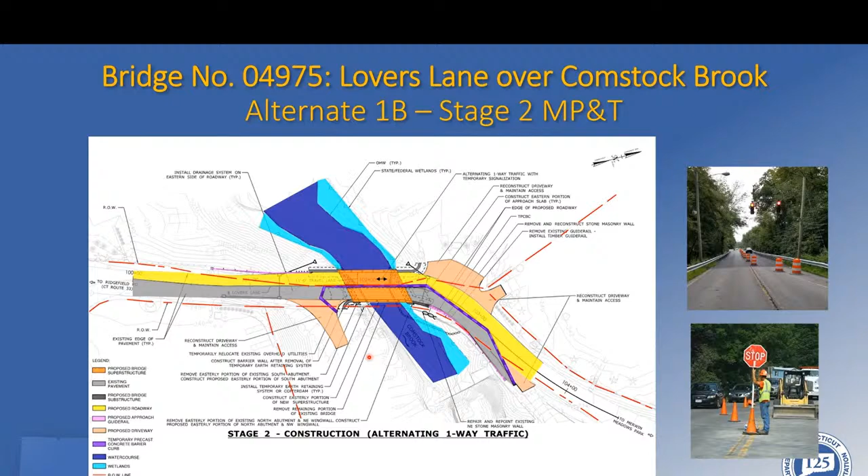Okay, thank you very much, Tom. So it looks like we're no longer receiving any more questions for this evening. So I am going to take this opportunity to start wrapping up.